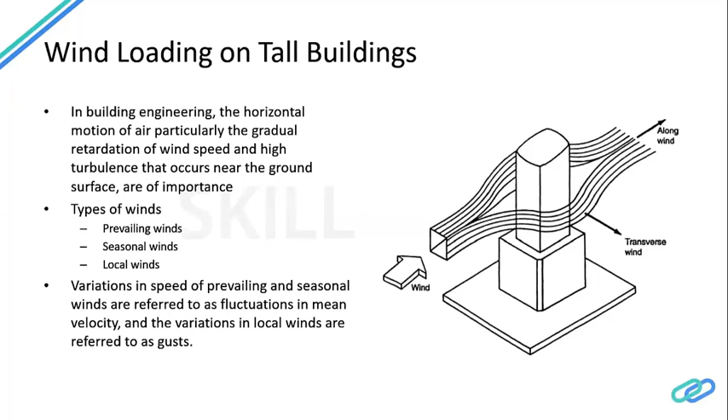Now this is wind from one direction, shown for illustration purpose only. Understand the wind could happen from any direction around the building. Throughout the presentation, we'll be talking about one direction just to convey the concept of how we are designing this. Now the characteristics of wind itself. Why is wind so critical to tall building design?

The first characteristic is your wind velocity increases with height. So the wind force you face at 50 meters above ground is much less than the wind force that you will face at 300 meters above ground. So for a short building, your wind load may not be governing the design, but when you have a 300 meter or 600 meter tall building, your wind force is too high, and then that governs your overall design. So that is the first factor.

The second is wind turbulence. Again, as you go higher above the ground, the flow of the wind becomes turbulent, which creates eddy currents, etc., into the building. One such phenomenon that is created is called vortex shedding. I'll explain briefly about vortex shedding because this is one of the critical characteristics of wind which is considered in the design of tall buildings. And there are many buildings which are designed to avoid this phenomenon from occurring.

The last one is wake buffeting. In short terms, if you're walking between two tall buildings in any location, you will always feel the wind force is higher there than in a place where there are no tall buildings. When there are two tall structures, there's a lot of wind pressure occurring between these buildings. That phenomenon is called wake buffeting. It just means you're channeling the wind forces into a certain location, which creates more pressure on the buildings.

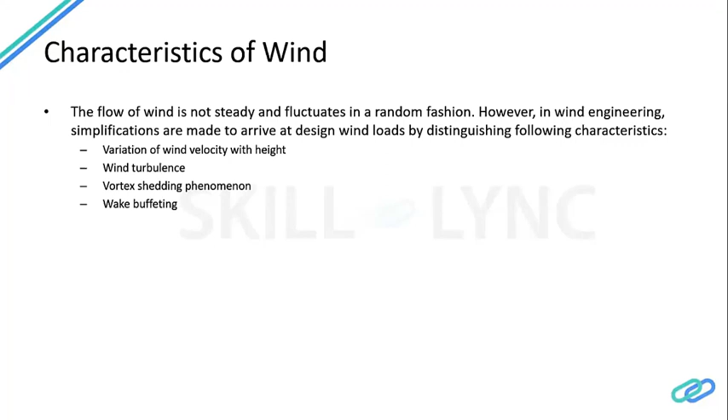Now, like I said, the most interesting wind characteristic, at least for me, is vortex shedding, because if you care to read about the design of various tall buildings around the world, you will come across the term vortex shedding again and again. So this is one of the major phenomena considered in the design of tall buildings. Now, what is vortex shedding? Basically you have a wind. I can go to the next slide.

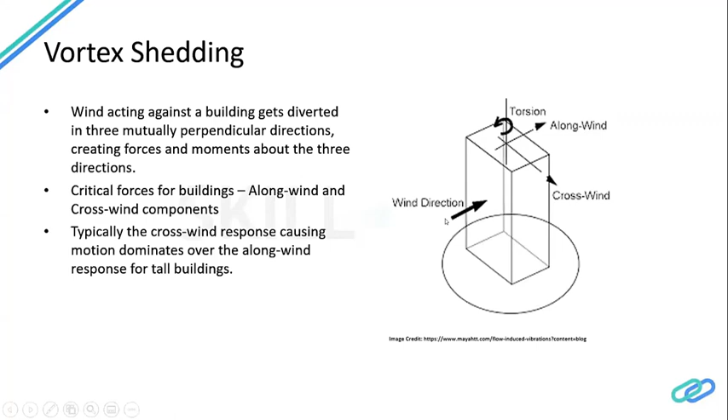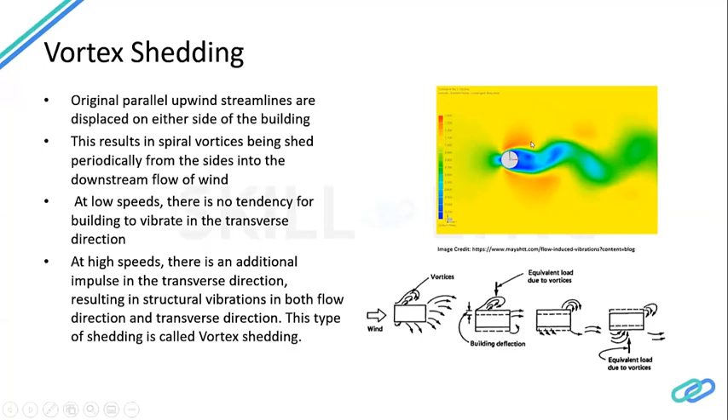And generally, more than the along wind response, it is this crosswind response which creates a lot of challenges in tall building design. So that is why vortex shedding is generally considered to be a critical parameter in the design of tall buildings. Like I mentioned here, at low speeds, there is no tendency for this to happen. So for a short building, this generally doesn't happen because your wind forces are much lower. But at a tall building, the wind forces are higher, which means your building is going to be subjected to vortex shedding here. I'll go to it slowly.

So how do we decide what are the wind loads acting on a structure? Now, you all know that we have codes in ASCE, in Indian standards also, we have codes defining what are the wind loads to be acting on a structure based on the geographical area, based on the buildings or the surface around it, based on the wind speed in that area, etc. Now, these codes have certain limitations. These wind loads cannot be used above a certain height of the building.

So as per, again, an American standard here, the wind loads determined from the code are expected to envelop most building structural shapes. Buildings or other structures that are clearly unusual should be designed using wind tunnels. So that is where wind tunnel technology is used. Now, a tall building is definitely an unusual shape. Generally, wind tunnels are recommended in the following cases.

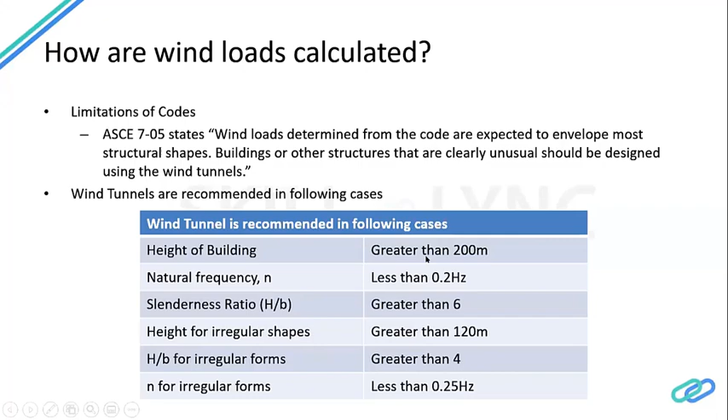So whenever there is a building which is greater than 200 meters, which is a tall building in itself, it is recommended to go for a wind tunnel testing to understand what is the load acting on the structure in terms of the wind within that location. There are also other parameters, but as a designer, generally the height of the building is considered to be the most critical parameter. So whenever there is a building above 200 meters, we recommend the client to do a wind tunnel testing. Now, what is a wind tunnel testing? This is one of the interesting aspects of a tall building design.

Now, wind tunnel testing is a procedure where they make a model of your building. In this picture, if you see, this is the prototype of Shanghai Tower, I think, from China. So they prepare a scaled model of the building to be tested, which is in a different color here. And they also model all the buildings around it. Now, the reason for modeling all the buildings around it is, like I said, buffeting is one of the phenomena. For example, there's a tall tower here, there's a tall tower here. The force within these two towers will be much higher than the force on the other side because there is no obstruction there. So that is the reason they go about modeling the buildings around it to a certain distance around it.

Now, once the model is done, they put it in a tunnel. That's why the name wind tunnel comes, and they subject it to certain wind forces. How they create the wind forces is through jet fans. So they set the jet fans to a certain speed of wind, which is based on what is the wind forces expected in that particular location. So this is what they generally do, and this is what I've explained here as well. So they generally test this building for the force that it is expected to act, and they see what is the response of the building.

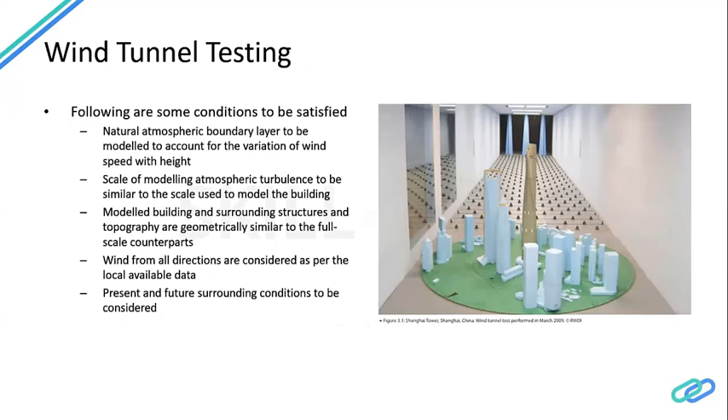So in order to do that, they need certain parameters from the structural engineer to model the building and also to understand its response. So that is where there is a discussion between a structural engineer and a wind engineer to decide what the response of this building is going to be, and what are the loads that are acting. Now, I just put in the steps that we generally follow in the design of a building in a design office itself.

So the first step is the structural engineer builds a three-dimensional analytical model to obtain the geometrical behavior of the building. This is where your software like ETABS or MIDAS or Robot Analysis comes in; there are many. You can choose any software to create a three-dimensional analytical model of your tower. You build the model, you apply the loads on it, and you study the behavior of the building. Once you have the behavior, which is basically the structural data, I will explain in the next slide what data we share with them.

So once we obtain the structural data from the analytical model, we will share it with the wind tunnel specialist. After this, the wind tunnel specialist will build a scaled model, like I showed in the previous slide, including the surroundings, and then simulate the wind loads based on the climatic data available from your weather monitoring stations, etc. And then they study what the impact of this force on the building is.

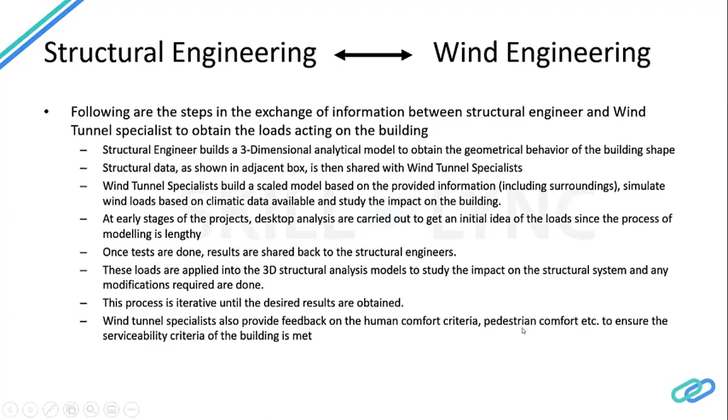This is generally what happens between a structural engineer and a wind engineer. Like I told you, there is some structural data that the structural engineer passes on to the wind tunnel specialist, listed here. One is the ETABS typical floor plan showing the location of the origin, which is the center point of the building. Then you have the story heights, your floor-to-floor heights across the height of the building. You have structural damping, which basically depends on the type of material you are using in your design, and certain parameters which come directly out of ETABS. I'm not going into detail on all these because this is a bit more advanced and beyond the scope of this presentation. There are also some architectural plans and 3D modeling that are shared.

So the wind tunnel specialist can build his own prototype model for testing. Now, what we get back from the wind tunnel specialist are the wind forces and moments. As structural engineers, we are only interested in forces and moments. We don't care about anything else mostly. So they give us the forces to be used on the building.

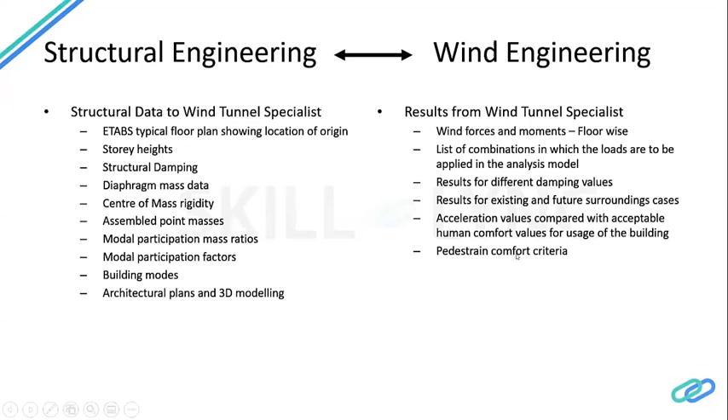They give us the combinations to be used. Like I told you, the wind acts from all directions. So they tell us at a given point which direction is critical and how we combine these different directions. So that is a list of combinations they give. They also give you results for different damping values, then existing and future conditions, like I told you. And then they give you the acceleration values and pedestrian comfort criteria, which I just explained in the last slide.

Now, like I said, in order to mitigate the displacement, one way of doing it is to increase the lateral stiffness of the building. The other way is to provide additional dampers. Now, this is only a very brief idea. So in general, what they do as a damper is they put a heavy weight on top of your building. So it basically provides additional damping and controls the displacement.

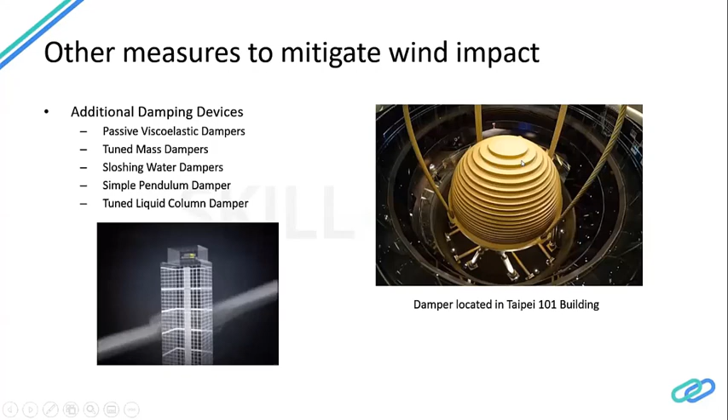This is an example of a damper which is located in the Taipei 101 building, one of the tallest towers in the world. And this is also a tourist attraction. People are allowed to go and see this. You can search it on Google. It's very impressive in itself.

So in terms of design process, there are generally 3 stages that we do in a design office. One is the concept design stage, which is basically finalization of built-up area, column wall arrangement, building geometry, number of floors, MEP requirements, etc. This is generally done by the senior technical people within the company, which is the directors or team leaders or principal engineers.

The second stage is the scheme design stage, where we finalize all the structural element sizes. This also includes all the wind tunnel communication that we do with the wind tunnel engineers, all the iterations, and then finally we come up with the structural element sizes. And we coordinate with other disciplines like mechanical, electrical, and facade, etc. This is generally carried out by senior structural engineers, lead project engineers, with a team of engineers, of course, to assist them, and BIM modelers. BIM is your Revit model, etc.

The final stage is the detailed design stage, where it is preparation of your reinforcement details and closing out any coordination issues, and basically you prepare drawings for your construction stage. This again is done by a similar team led by structural engineers.

So in terms of a career path, when you join a company, you'll probably start being in this team of engineers trying to help a senior structural engineer. Maybe you will design a column here, a beam there, or a slab here, and you will be part of a big project. But as you grow in your career, as you gain experience, you'll move to senior structural engineer or a lead project engineer, and there will be a team of engineers working under you. This happens maybe with 8 to 12 years of experience, or 8 to 15 years of experience. So you need to have a lot of patience to really move up the ladder in structural engineering.

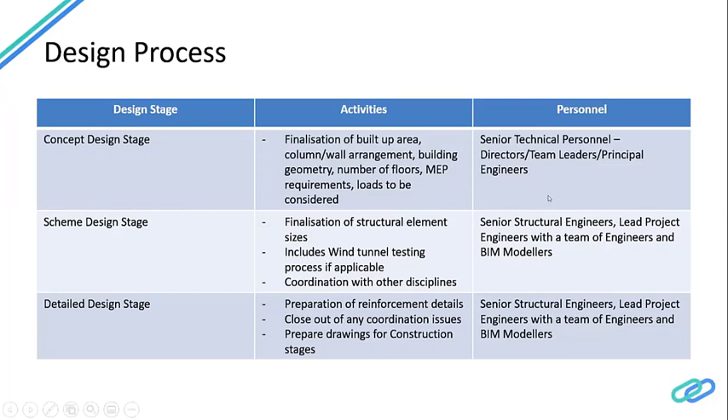And with further experience, maybe 15 plus years of experience, you will be a team leader or a director who decides on the major issues in the building, such as the building height, etc. So that will be your career path. You'll be growing from the bottom of the table right up there. And you need a lot of patience also.

So coming to the job opportunities, as a structural design engineer, I work predominantly in the building sector, so I can quickly check what the opportunities are in the building sector. Obviously you need a structural design engineer, you need a geotechnical engineer who defines the foundation systems and the soil properties of the foundation, etc. Then you have BIM modelers.

Now there is a trend in India where a lot of engineers are going into BIM modeling to design in Revit, etc. And there's definitely a huge future there as well. The whole construction sector across the world is moving into 3-dimensional drawing, and also trying to get everything into a 3-dimensional model, which helps in coordination, etc. So that is also a very impressive field for the near future, at least.

Then you have the quantity and estimation engineers. You cannot build a project without knowing what you're building. So definitely you need quantity and estimation as well.

Next one is planning engineers. Planning engineers generally decide the duration of a project and how the project is phased from design to construction and to handover. Then you have design coordinators who coordinate between different disciplines such as structures, MEP, facade, or architecture, etc. Then obviously you have site engineers to execute the work on site.